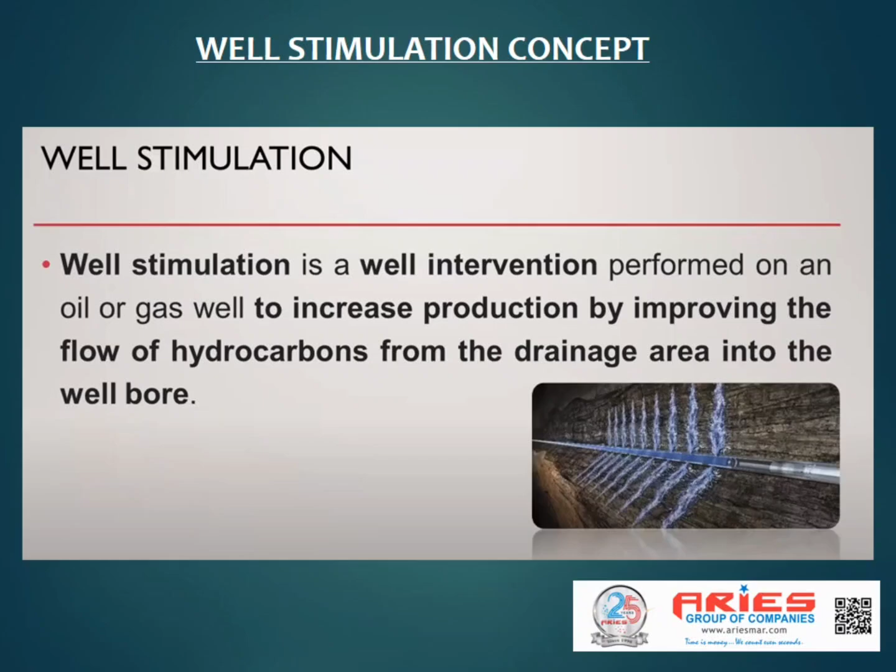Well stimulation technique. Well stimulation is a treatment method that seeks to increase the rate of oil and gas production flow from the reservoir in new or workover wells. It is used for situations where the natural reservoir flow characteristics are not favorable and need to be improved for effective oil-gas recovery.

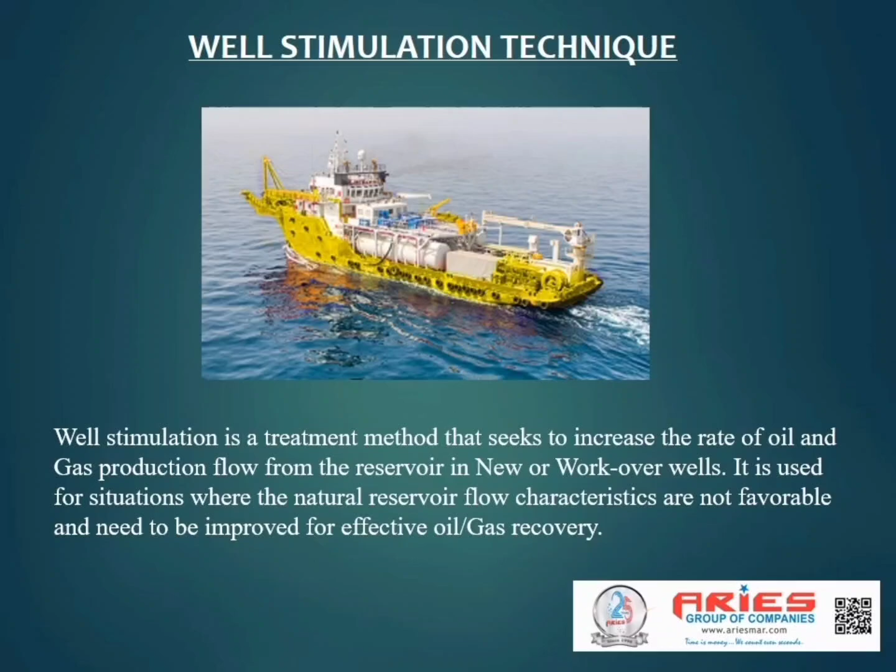Well stimulation vessels. Well stimulation vessel means the offshore support vessels which are capable of injecting stimulation into the oil-gas wells at sea, while offshore support vessels mean those vessels with the special functions to provide transportation services, performance activities and emergency responses in support of offshore engineering or exploration, exploitation or production of offshore energy resources or alternative energy resources.

A well stimulation vessel mainly provides services for production of wells, injects stimulation substances into wells through the operation of well stimulation installations and equipment to improve the productivity of oil and/or gas, and supports the offshore engineering production.

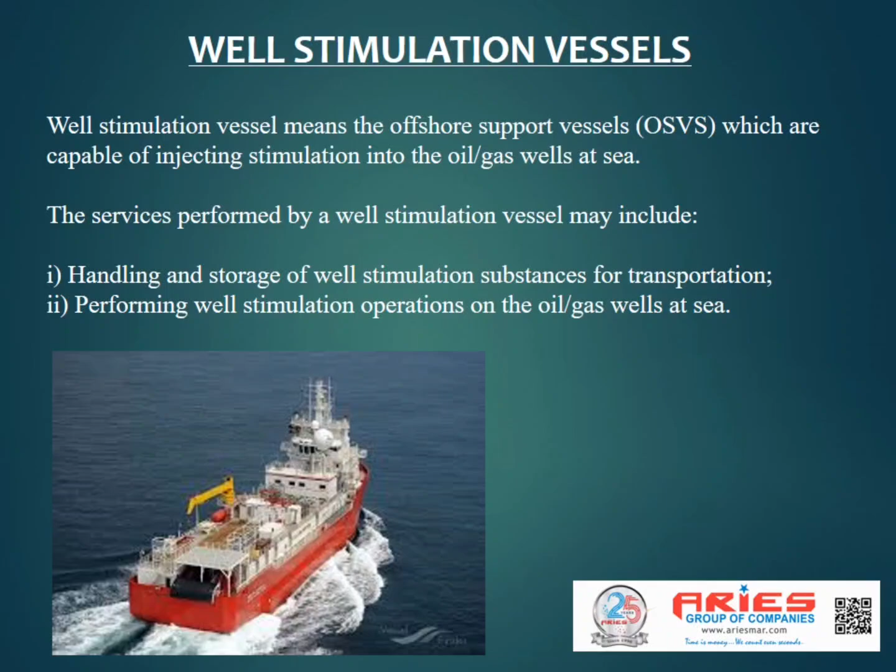Class notation and requirements. Vessels fitted with well stimulation systems that comply with the class requirements are eligible to be assigned additional class notation: Well Stimulation Vessel. Vessels designed to be well stimulation ready, that comply with class rules, are assigned with the notation Offshore Support Vessel WS Ready.

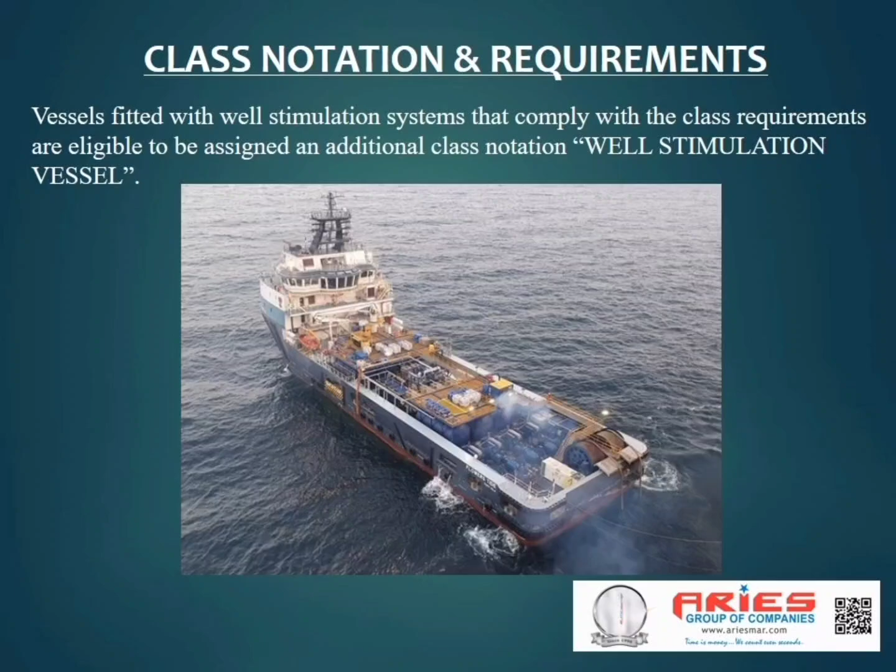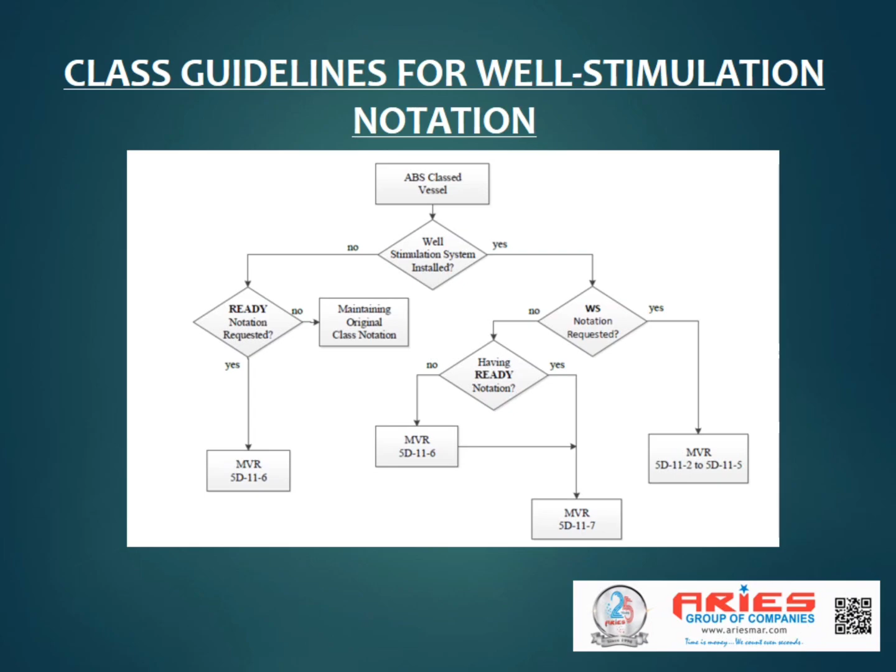Class guidelines for well stimulation notation. It is the responsibility of the owner to select the class most suitable for the intended service and ensure that the vessel is operated in a safe environment with respect to the risk of fire and explosion. Required documents for approval and certification: hull plans, trim and stability booklets, arrangement plans and equipment data, strength calculations, documentation.

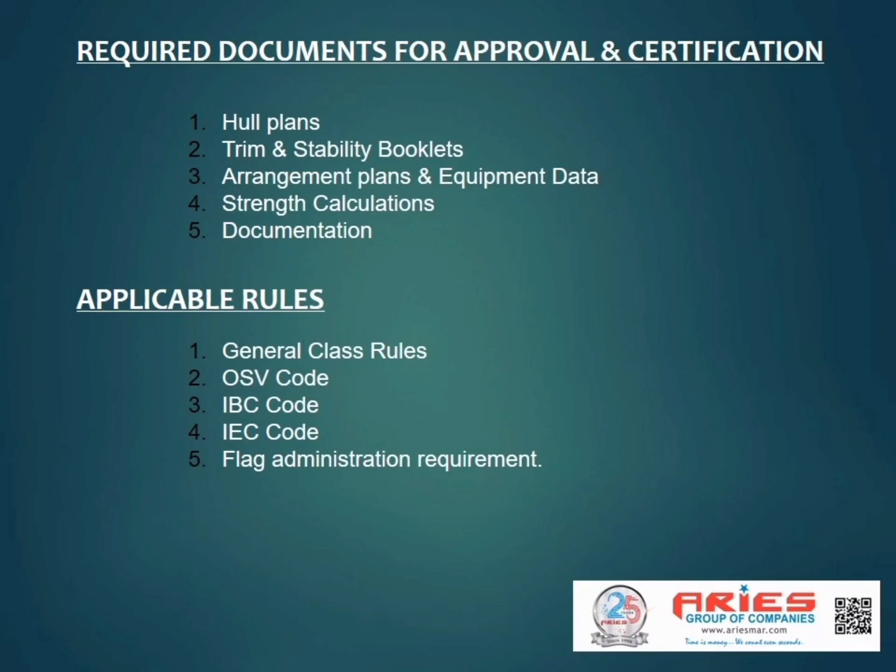Applicable rules: we have to follow the general guidelines by the classification where the vessel is classed. In addition to that, we have to refer to the following codes and requirements from the Flag Administration: OSV code, IBC code, IEC code. Our involvement: we have to perform the following job scopes once the owner confirms the vessel for well stimulation conversion. Feasibility study, including preparation of concept layout and hazardous area plan with stimulation equipment for owner review and approval.

Upon completion of the feasibility study and owner confirmation, we will go ahead with engineering design for the well stimulation conversion, which includes the following: preparation of layouts, acid tank structure design drawings, stimulation equipment foundation drawings, modification of piping system drawings, deck strength and equipment foundation analysis, vessel stability calculations, preparation of required manuals for the stimulation project. Class approvals and certification follow-ups.

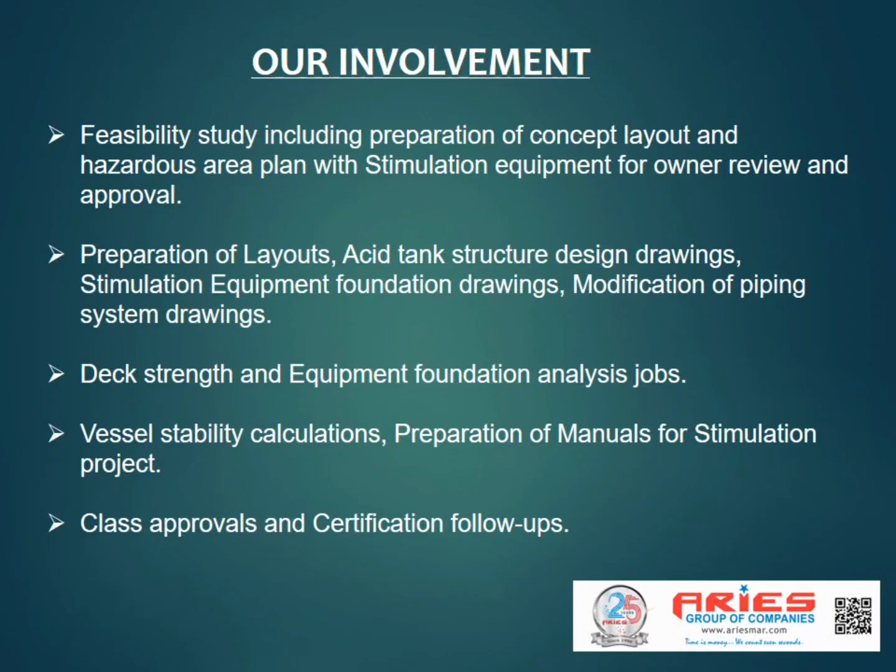A feasibility study has to be performed including the following: layout showing all the well stimulation equipment, acid tanks and control stations as per client and tender requirement. New hazardous area plan with stimulation equipment. Stability check for the compliance of the vessel with IMO stability criteria, wind criteria and crane operation criteria. Compliance to the damage stability is checked by comparison of limiting GM provided in the existing approved stability booklet.

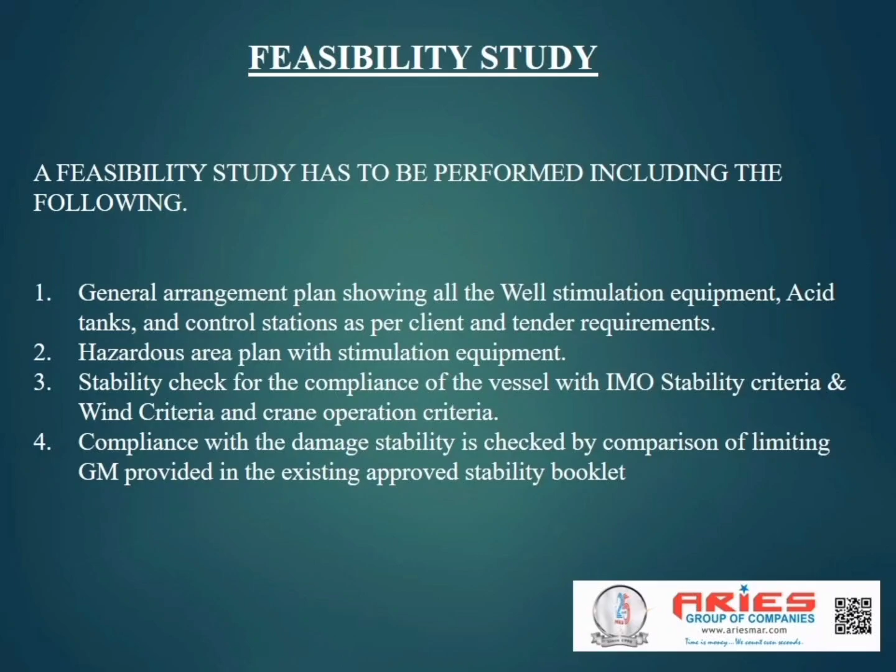Well stimulation layout. The well stimulation equipment layout and hazardous area plan are key drawings in this well stimulation conversion. An initial layout showing all the well stimulation equipment is made per input from the stimulation company to meet the tender requirement. In the initial layout we have to show all the well stimulation equipment, modification to the existing structure and additional platforms and walkways for safe access to all the areas.

A new crane is required for the equipment handling and the crane has to reach the whole main deck. The capacity of the crane is to be considered as per tender data.

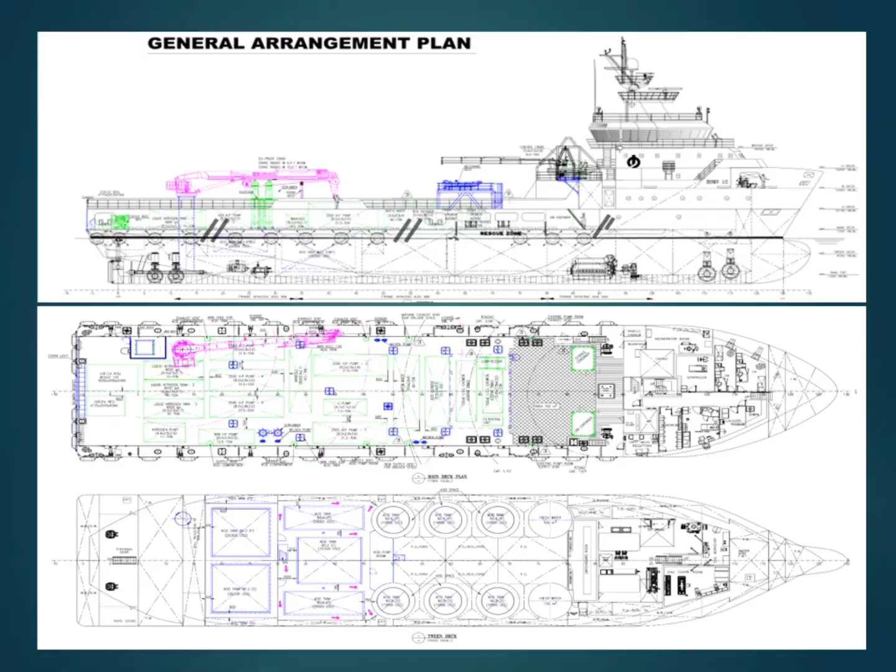Hazardous area plan. Once the layout is confirmed by client, we will have to prepare hazardous area plan referring class rules, OSV code, IEC code and IBC code. In the hazardous area plan we have to show host vessel's updated area classifications due to installation of the well stimulation equipment and the equipment certification demonstrating its suitability to the intended hazardous area classification.

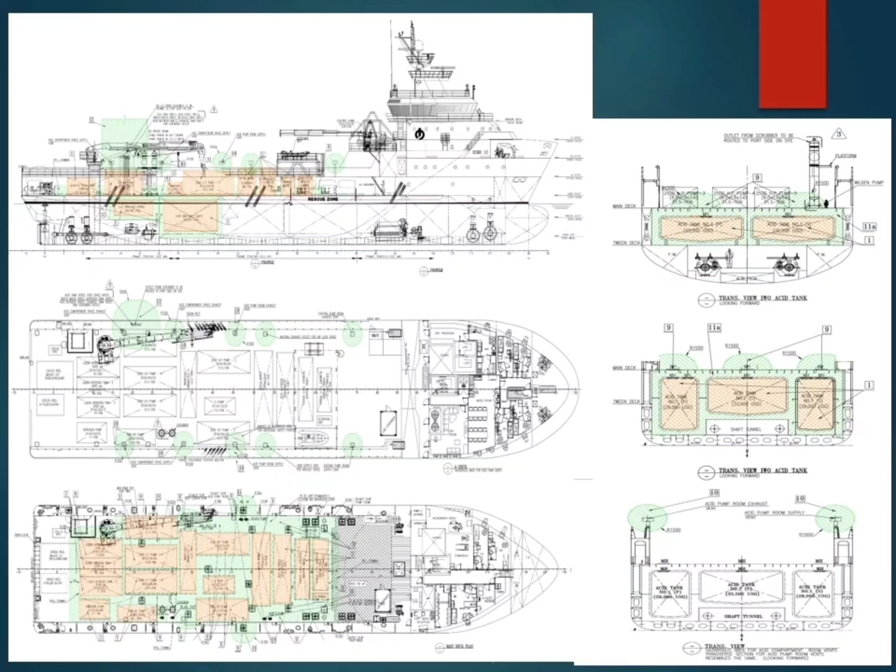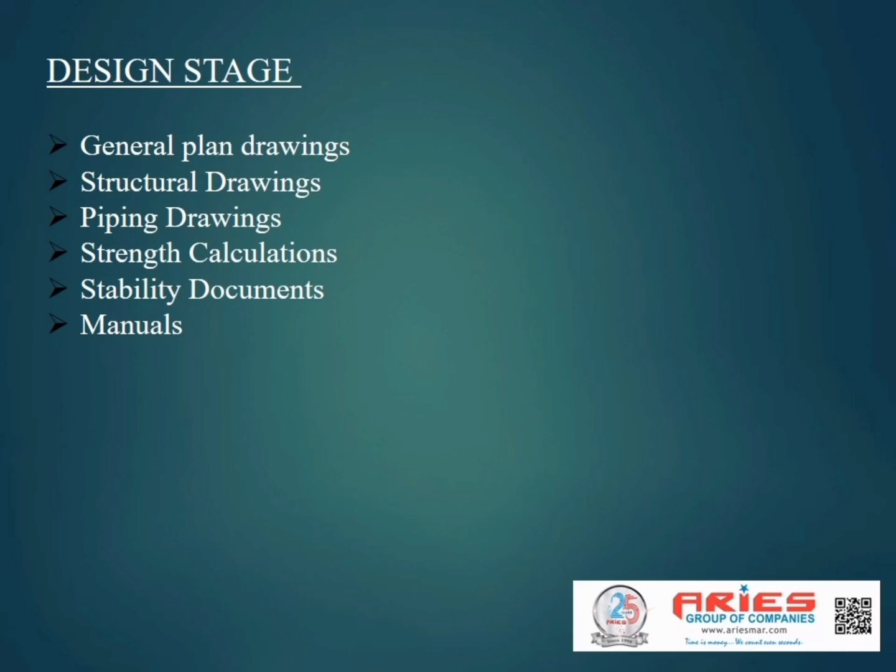Design stage plans showing the arrangement, details, and interface of the well stimulation equipment onboard the host vessel are to be prepared and submitted for approval. We can categorize the above requirement for document preparation as per our standards: general plan drawings, structural drawings, piping drawings, strength calculations, stability documents, manuals.

General plan drawings. General arrangement plan of the vessel showing the proposed location of each equipment onboard the vessel. Hazardous area plan. We have to show host vessel's updated area classifications due to installation of the well stimulation equipment and the equipment certification demonstrating its suitability to the intended hazardous area classification.

Updated fire control plan as per latest general arrangement plan with stimulation equipment. Fire protection plan has to be prepared if we are modifying the existing structure at main deck. Damage control plan to be prepared if we are modifying existing tank openings, access openings which is affecting damage stability of the vessel.

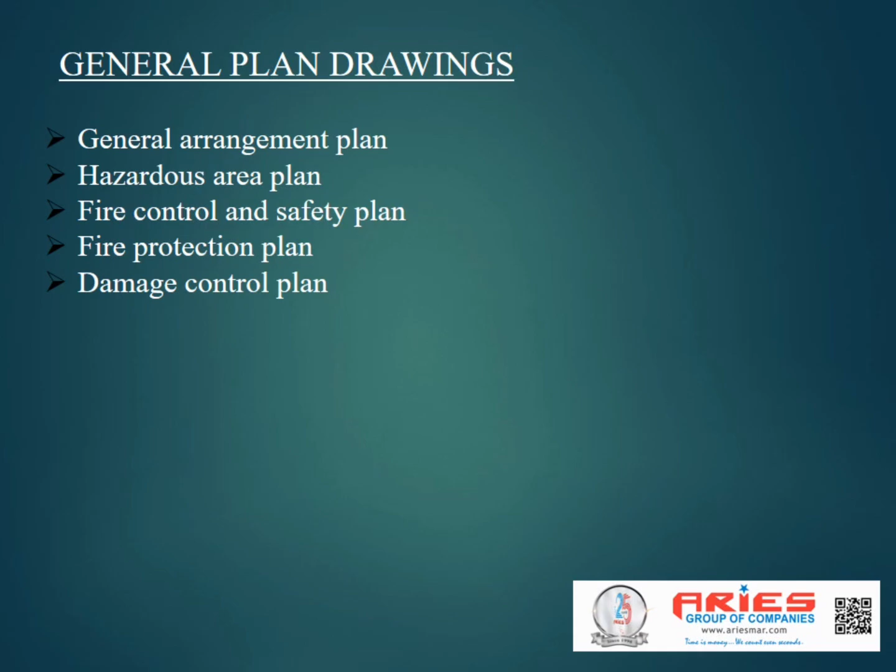Strength calculations. All the well stimulation equipment shall be placed on the main deck, hence a complete deck strength analysis to be done as per class guidelines. In some cases client may ask to provide the design for non-standard custom-made acid tanks. In this case strength calculation for the acid tank structure including skid foundation design will be in our job scope.

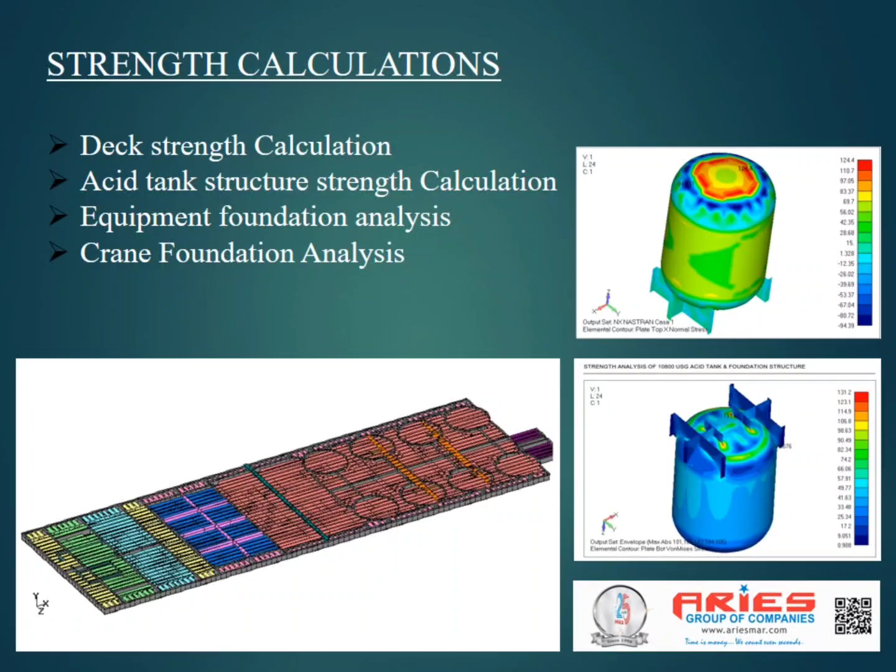Structural drawings. Following areas we need to cover in the structural drawings. Drawings showing the well stimulation equipment securing details and arrangements of sea fastening. Drawings showing scantlings and details for the supporting deck structure on which the equipment is to be installed have to be prepared. A detailed drawing showing the drip trays for collecting cargo residues in cargo lines and hoses is to be prepared.

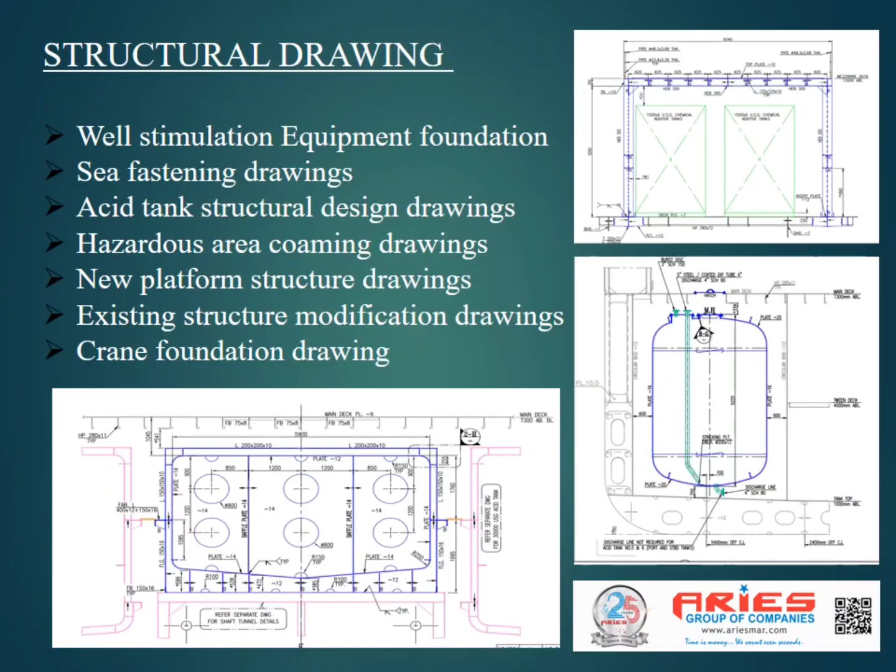In addition to above we have to prepare new modification drawings such as storage platform design drawings, existing structure modification drawings, crane foundation drawings.

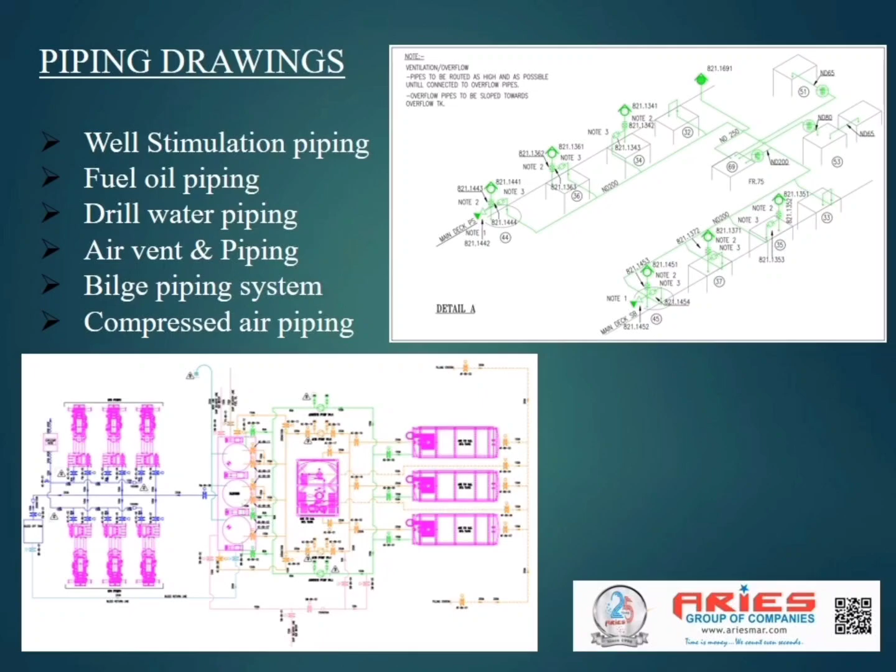Piping drawings along with well stimulation system design drawing from the supplier. We have to prepare integration with the host vessel's piping modification drawings as part of conversion. Following are the major piping drawings to be prepared for the conversion: fuel oil piping, drill water piping, air vent piping, bilge piping system, compressed air piping.

Stability documents. Lightship weight calculation shall be prepared to estimate the total weight after modification for the stability calculation. Calculations demonstrating the adequacy of the vessel's intact and damage stability for the well stimulation processing equipment and the tanks anticipated to be installed and operated on board are to be prepared and submitted.

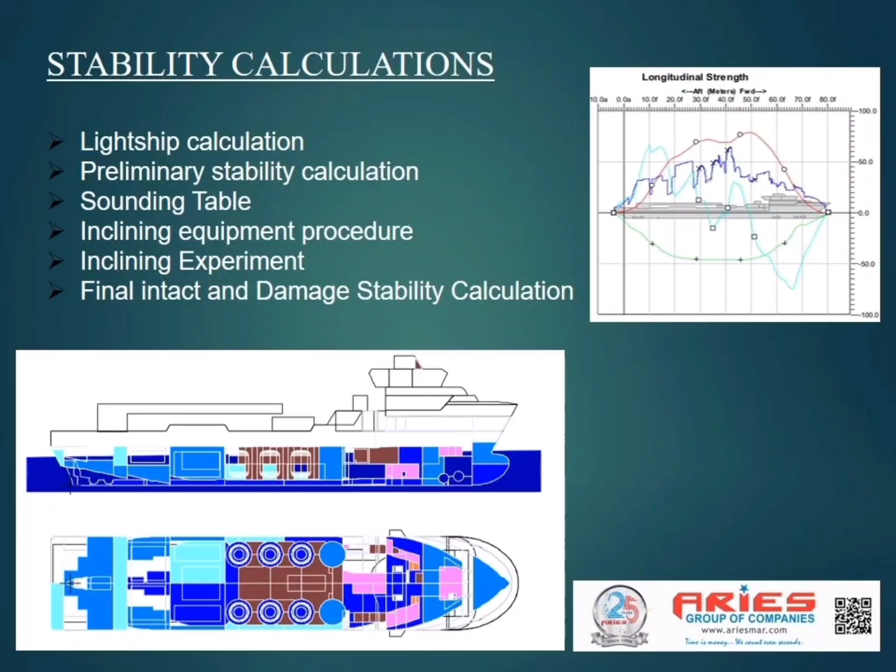Based on lightship weight calculation and preliminary stability, inclining experiment procedures shall be prepared based on class requirement. After inclining, final stability booklet has to be prepared and submitted for approval.

Manuals. The operating manual is to be prepared reflecting the list of well stimulation equipment to be used, its location and its deployment and stowage procedures. Based on MARPOL 73/78 requirement, procedures and arrangement manual to be prepared and submitted.

Damage control booklet indicating damage control comprises the entire system of maintaining watertight integrity, controlling stability, repairing damage, providing for defense against gas, and caring for injured personnel to be prepared and submitted.

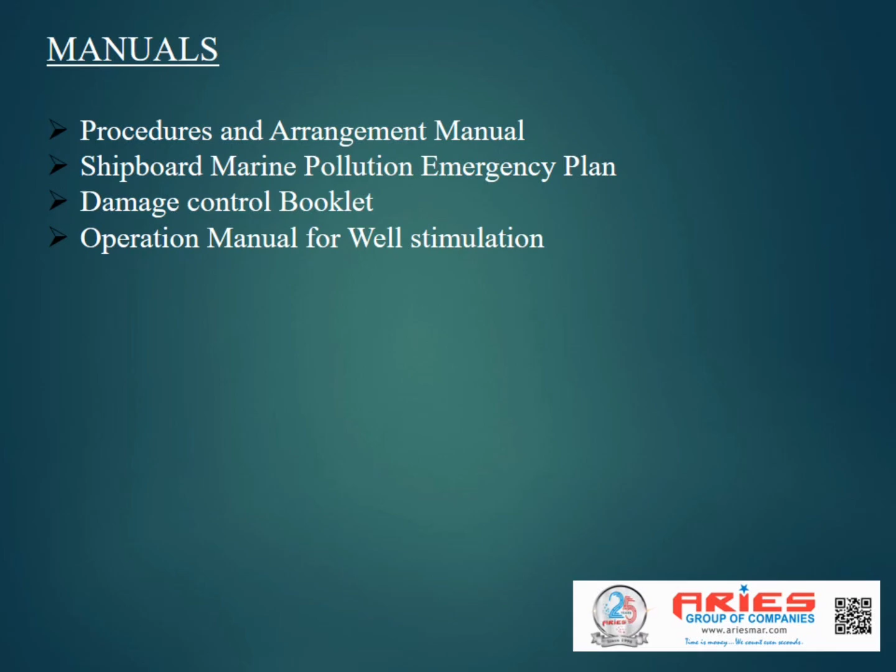Shipboard marine pollution emergency plan has to be prepared in accordance with the requirements of Regulation 37 of Annex I and Regulation 17 of Annex II of the International Convention for the Prevention of Pollution from Ships. The purpose of this plan is to guide the master and mates on board the ship with respect to the steps to be taken when a pollution incident is occurring, has occurred or is likely to occur.